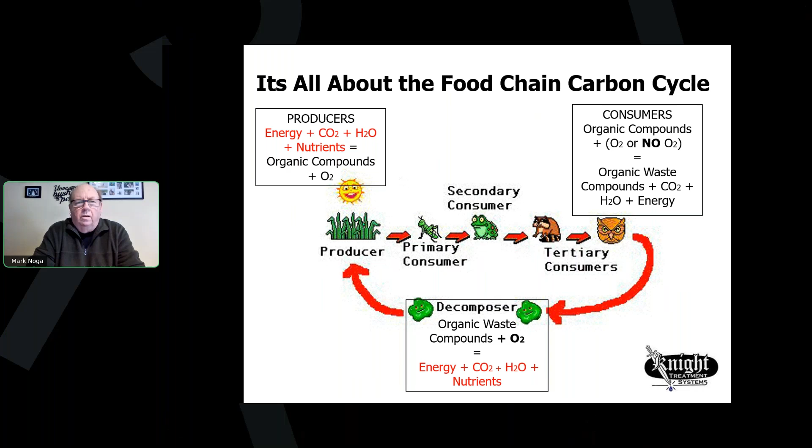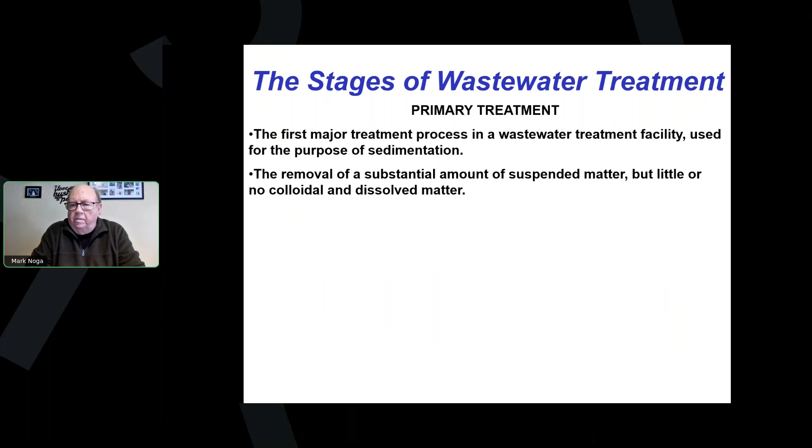When we look and we talk about wastewater treatment, there are three primary stages. Primary treatment is the removal of suspended matter and settleable materials and solids. In an on-site system, this is done at your septic tank.

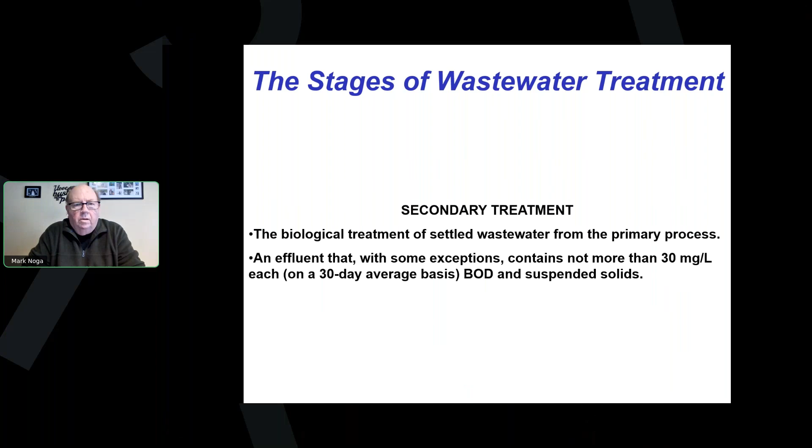Then we get into the secondary step of the process, secondary treatment, where we rely on this biological workforce to take and break down the organics to relatively small and harmless compounds, and effluent by scientific measurement, typically no more than 30 milligrams per liter BOD or suspended solids.

Then we get into the third step, tertiary treatment. This is after all the biological processes have been completed, because it involves removal of nutrients, nitrogen and phosphorus. You'll hear about technologies that talk about removing nitrate or phosphorus, but if they get ahead of the process and don't break down the organic constituents, you can run into problems.

Organics are measured in a term called BOD-5, the biological oxygen demand over a 5-day period. A general rule of thumb in wastewater treatment is for every 100 parts of BOD organics you have, you generally need 5 of nitrogen and 1 of phosphorus to help the workforce. We're going to talk about that a little more.

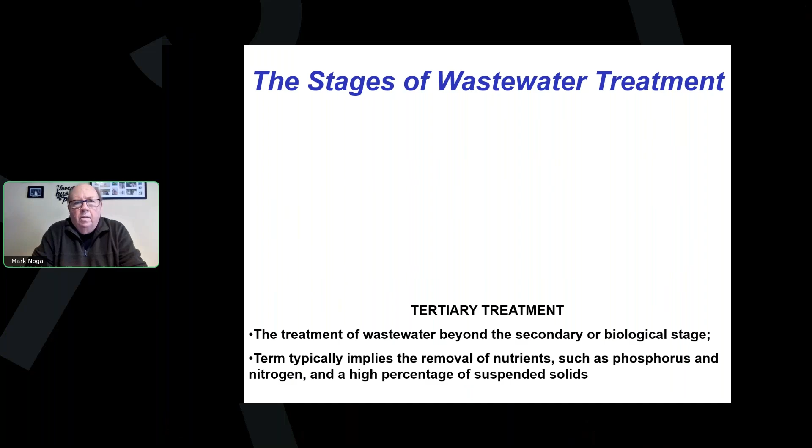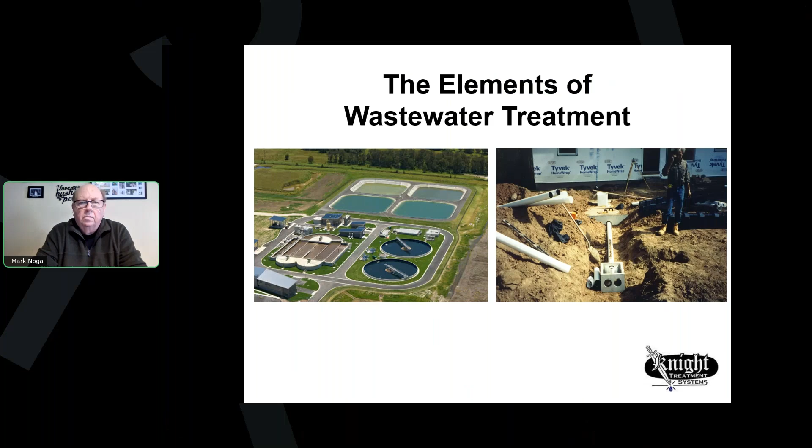Elements of wastewater treatment: the fundamental principles behind wastewater treatment are universal. They're the same whether you're looking at a large-scale community treatment works or one of the small individual on-lot systems. What we have is a workload, okay?

We've got organic constituents in the waste stream, and they vary widely across our society, whether we're dealing with a single-family individual home or a commercial establishment that generates higher strength wastes, such as a restaurant or a food facility. So knowing what the workload is really dictates what type of system is needed to accomplish complete wastewater treatment. Knowing that workload is very important.

Then we've got the workspace. Where are we going to try to complete this wastewater treatment? Your wastewater treatment system is much like a recycling factory. Certain things need to be disassembled or broken down and sorted into elemental components for return to the environment. Workspace can highly vary where this biology happens. We'll talk a little bit about that.

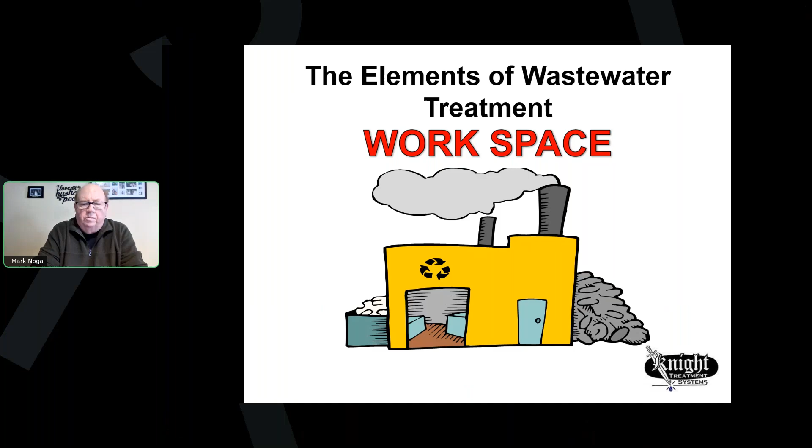Then we've got the work environment. Much like you, myself, and the other people on this presentation, we all have optimal working conditions. Well, in the biological world of wastewater treatment, such things as the pH of the wastewater, the wastewater chemistry, the constituents that come down a waste stream matter.

If you think of it, at least in my short lifetime, I've watched the waste stream evolve significantly. It used to be that if you didn't eat it or drink it, you flushed it down the toilet and that was it, it was taken care of. Now we've got all sorts of cleaners, additives, chemicals, everything from disinfectants and body washes to non-biodegradable ingredients, and all have an impact on how the process works.

We want to look at such physical aspects in the work environment as temperature. The biology is very temperature sensitive. Think of refrigeration—cool temperatures slow down the process of decay. That's what we're talking about here in wastewater treatment: we want to erode or decay the constituents, and much like us, temperature has a big bearing on what we're capable of doing.

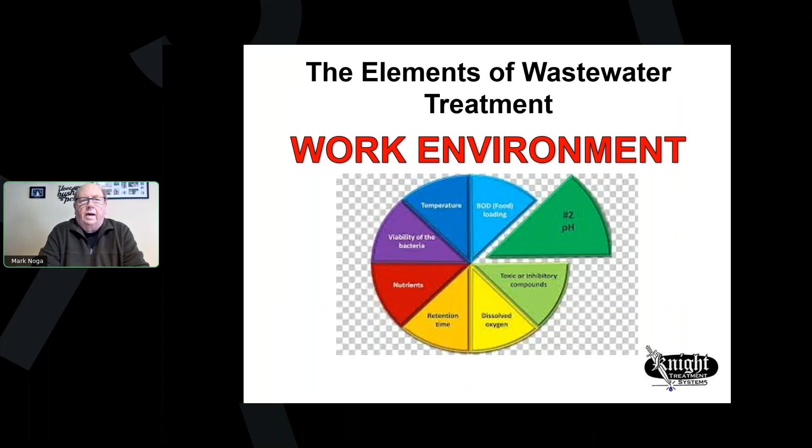Then we've got the workforce, the multitudes of bacteria available out in the world, and science is still discovering more. Where the work is taking place is going to direct what kind of workforce we have. Not all the workforces and environments are the most optimal to break down certain elemental components, but we highly rely on this workforce. So when we talk about these things, we talk about the environment.

In a conventional septic system, soil must provide the right conditions, both vertical and horizontal separation, to create aerobic conditions for the biological workforce to convert waste into harmless byproducts. That's why in a traditional system, shallow trenches are best—long, narrow, shallow trenches. We don't want saturated conditions; we want to apply the wastewater and then give them a chance to do their thing and promote gas exchange.

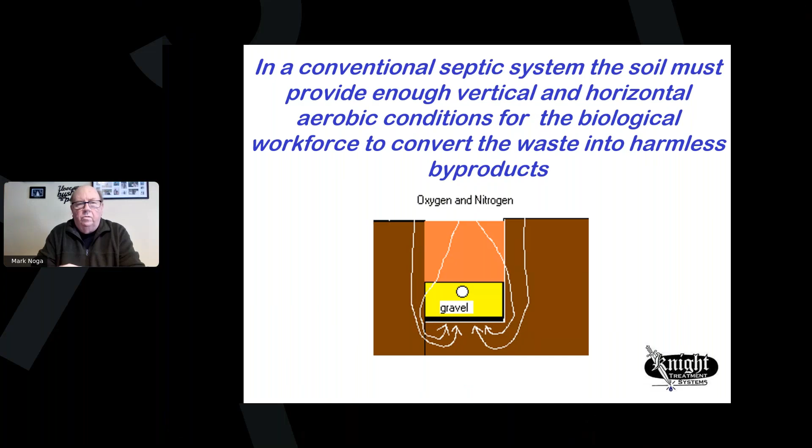When you look at the soil profile or the soil interface, soil is made up of very diverse particles of various sizes, types, and shapes.

And it's the spaces between these soil particles that are the conduits for fluid movement and gas exchange. When we get into some sediments, silt and clay, they're more uniform in particle size. They have just as much pore space available volume-wise, but they're a lot smaller.

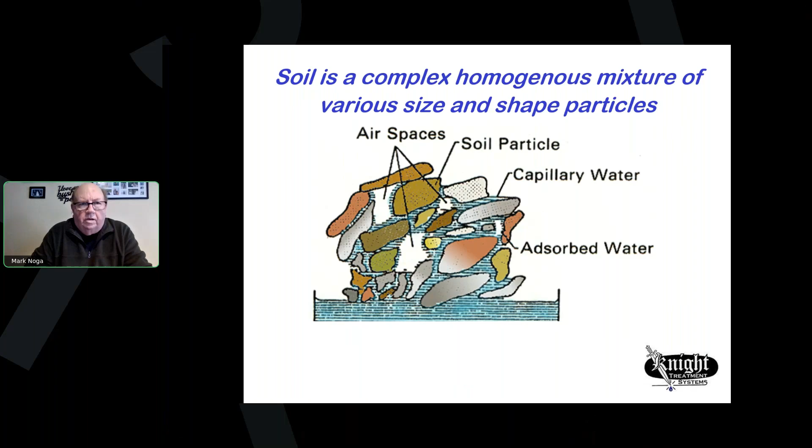I don't know how many of you are familiar with EPA's 2002 update of their on-site wastewater treatment manual. It's available online through the EPA, but if you go and look, there's a great chapter or section in there about wastewater application to various soils and what you might be able to expect for treatment.

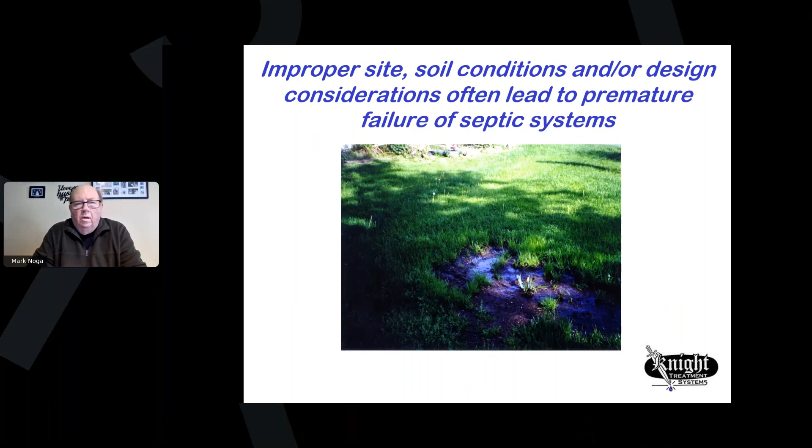When we have a failing septic system, we are certainly providing contamination to ground and surface waters. And a septic system need not fail or come to the surface to be in failure of providing adequate treatment. Look at some of our coastal zones where nitrate loading is very important. Dealing with some very porous soils and coarse sands, we're getting nitrification of the ammonia in the wastewater, but we don't have a chance to denitrify it, and it'll cause coastal issues.

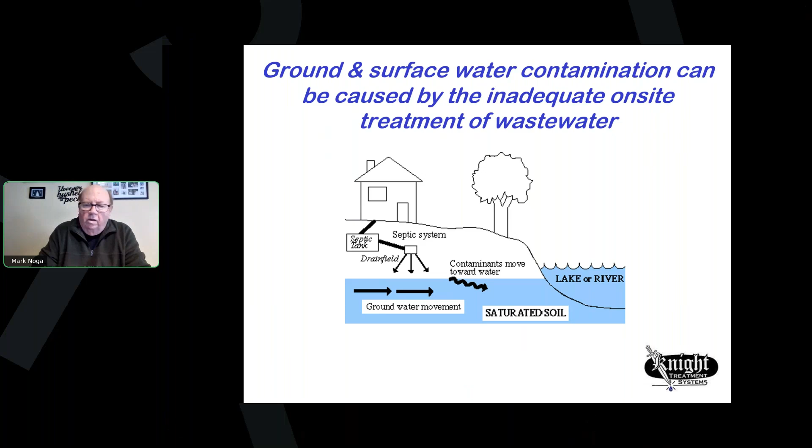Surface breakouts in freshwater zones - it's the phosphorus that normally can get bound up by iron particulate in the soil, but when it comes to the surface and is captured by stormwater runoff or overflows, you're going to have eutrophication of the lakes.

So understanding forms of on-site treatment technologies, to identify acceptable options, is very important, whether you're in a freshwater or coastal zone. And there's a wide variety of techniques out there.

And if you think of them like automobiles, okay - automobiles are universal in name, but each one has maybe a different property or a different attribute that'll do a job. Do you use a passenger car for a job that you need a dump truck for? So we're going to talk about these a little bit.

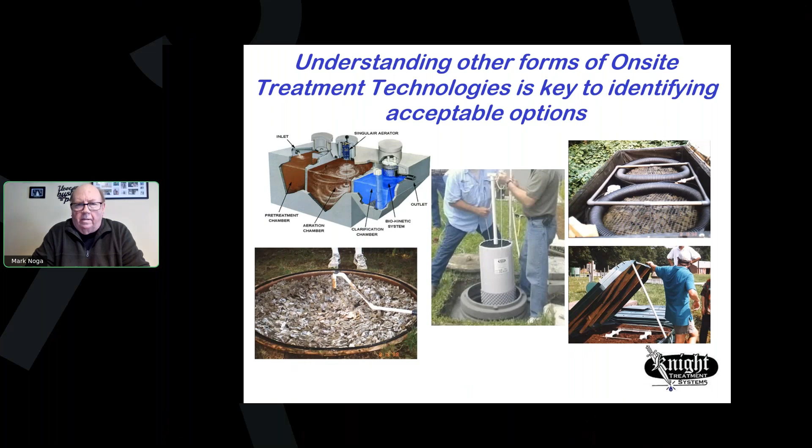The advanced on-site treatment systems, there's really nothing magical or mystical about them. They've been around for an awful long time. And most of the innovative technologies out there simply provide a more friendly workspace and environment where efficient biological treatment can occur. Time is also important.

Just like we need some time to eat a meal in a comfortable manner, the biology needs to be able to have enough time to break down the wastes. And wastes can come in very simple forms, such as sugars, or more complex forms, such as fats, oils, and greases.

So here again, many of these technologies out there are looking at providing and managing the operational environment for the biological workforce. In a large-scale municipal treatment works, you've got people that monitor this every day and make the adjustments. There are some systems out there now for on-site systems that are making that remotely possible, so you don't have to have a human being physically present every day.

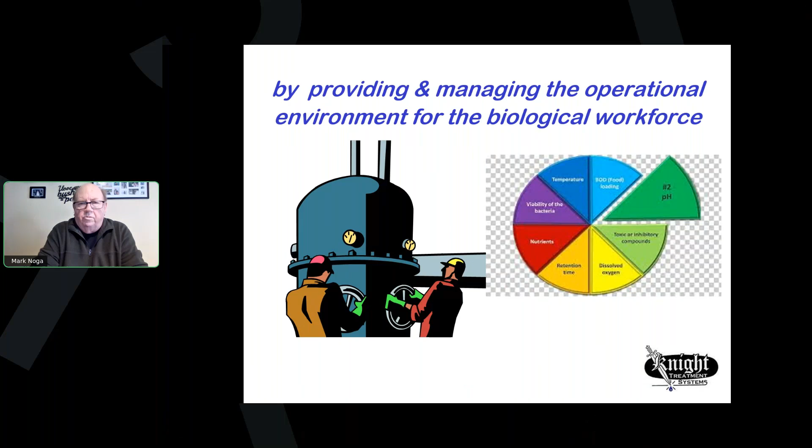And the fact of the matter is that distributed wastewater treatment on site is quickly picking up pace in our world. We can no longer afford to sewer the world. It's been a realization for many years. So some type of management is very important. And here again, managing the environment and the water chemistry and work conditions can get quite complex.

There are a few technologies out there that, instead of relying on the random and inadvertent selection of the biological workforce, science and biology has evolved to the point today that there are some technology suppliers actually putting a select group of microorganisms, introducing them and turning vessels into nurseries where these more aggressive forms of organic consumers can accomplish things a lot better than what would naturally populate a liquid environment.

Give you an example. Back in my day, the Exxon Valdez ran aground up in Alaska and released a phenomenal amount of crude oil. More recent is the Gulf oil spill with the platform that gave up millions and millions of barrels of crude oil. There were actually physical locations out there where the crude oil couldn't be cleaned up, and science had allowed a group of microorganisms - or discovered a group of microorganisms - that readily digested crude oil in place, that could be used.

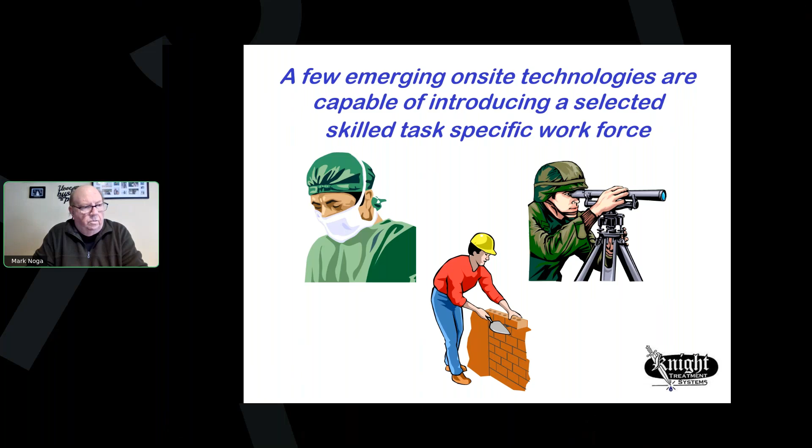That same type of science is being used today in on-site wastewater treatment. And more recently, with our interest in nutrient reduction, there are some processes that have been developed where it's absorption or bonding to various types of media, like a magnet would pick up steel. These compounds would absorb phosphorus. But here again, it's very important that phosphorus needs to be available, or at least a portion of it, until the end of the biological processes happen.

There's a technology showcase, and this is actually all not that new. This is what I originally did this presentation on. It's a City of Syracuse Skaneateles Lake demonstration project. It was part of the National Decentralized Water Resources Capacity Development Project. Back in 2002, a grant was provided to the City of Syracuse to put on this technology showcase.

Funding was provided by US EPA. There was a project coordinator and manager, and what it involved was the City of Syracuse Skaneateles Lake, primary drinking water source for the city. It enlisted the aid and guidance of various agencies in the watershed: Syracuse Department of Water, New York State Department of Health, Department of Environmental Conservation, the three county health departments, and the New York State Onsite Wastewater Treatment Training Network.

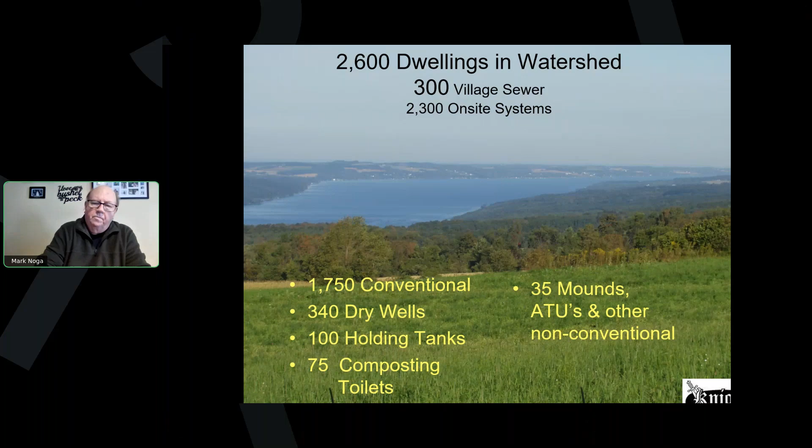Back then, Skaneateles Lake watershed had been managed since the late 1800s. They're very adept on what they had in their watershed. The inventory at that particular time was almost 2,000 conventional systems, 340 dry wells, holding tanks, composts and such. They put together a technical committee from the people that had joined the stakeholder group, and they went into design considerations, treatment cost, operation and maintenance, and system dispersal.

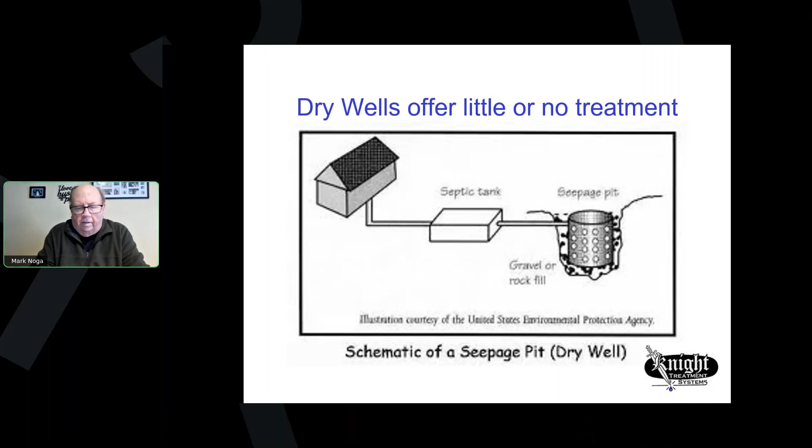The primary focus of this technology demonstration was to eliminate seepage pits and dry wells that were within 100 feet of Skaneateles Lake. As I said, Skaneateles Lake water is actually one of the largest unfiltered drinking water supplies in the United States. They don't put it through any kind of filtration system right now. They simply chlorinate it and put it into their reservoirs.

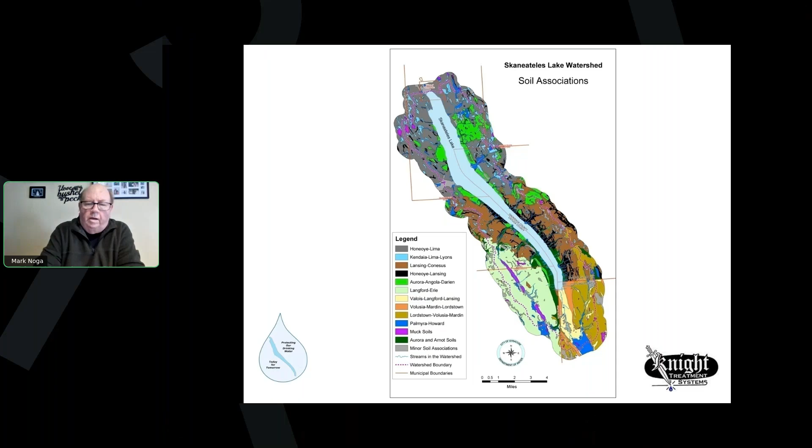Now, when you look at traditional conventional treatment, the soil types and the topography of Skaneateles Lake really aren't conducive to doing traditional in-the-soil-based treatment. So they looked at technology, and this was a technology demonstration project. They're looking for technologies that would deal with steep slopes and shallow depth of bedrock.

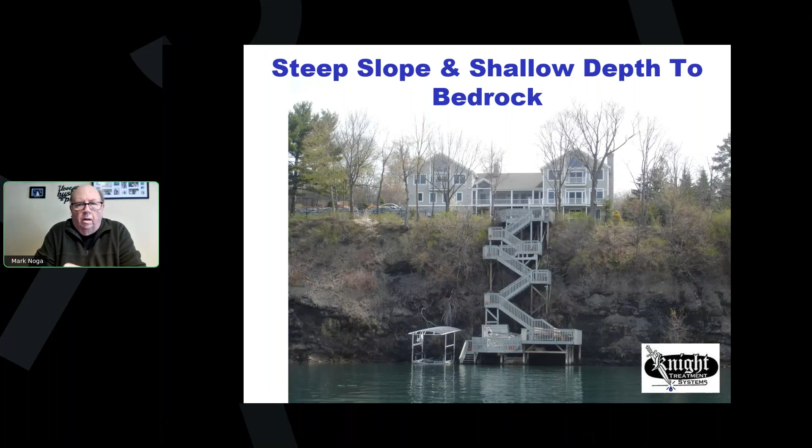Very little or no separation to surface waters, a multitude of summer residences and such, built right on the shore of the lake. Extremely small lots because waterfront property is very high in value. And then here again, steep slopes, very concentrated watershed. If I remember correctly, it's about 93 square miles, all that watershed, very steep slopes, runoffs occur very quickly.

In preparing for this presentation, I thought, let me do an AI search because it's becoming a big thing. Let's see what it comes up with when I pose the question: what's innovative in on-site technologies? Talk a little bit about them.

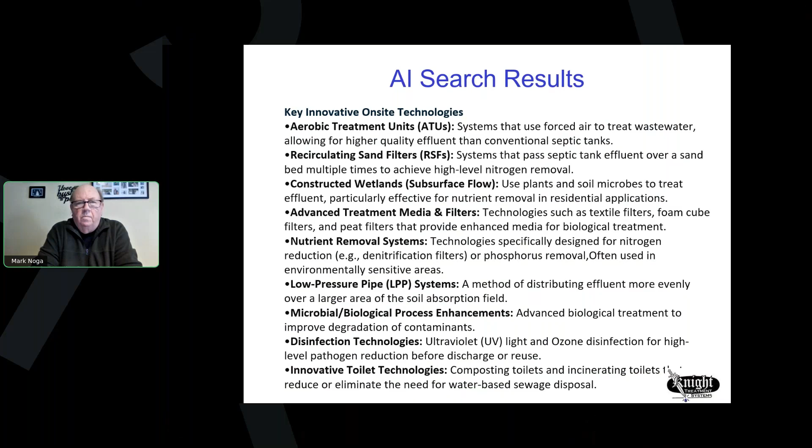So when the Skaneateles demonstration project came to be here in the early 2000s, what they were going to exhibit was gravelless types of technologies. That's where instead of a rock pipe trench system, medias were introduced underground via pipes and such, synthetic materials to grow the biology on instead of the surface of the soil particles.

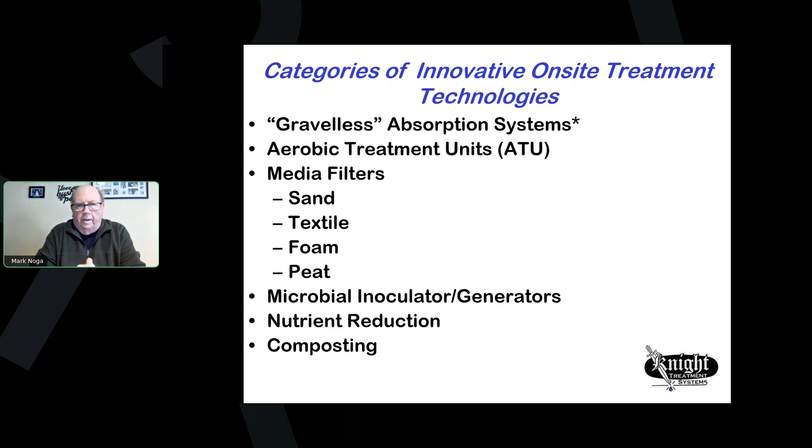You had aerobic treatment units, talk a little bit about them some more. You got your different media filters: sand, textile, foam, and peat, microbial generators, nutrient reduction, and composting. So this was what was put on at the demonstration project.

And they set some preliminary requirements when you're looking at these innovative products. It should be pre-engineered, small footprint, needs a proven history of performance, disperse clean water, and we'll talk a little bit about clean. It should be clean in color and eliminate clogging of the dispersal system.

And what they did is they turned to NSF Standard 40 Class 1 systems. NSF Standard 40 Class 1 is a yardstick that manufacturers can use to put their product up against to be tested to treat an individual residential system's wastewater from a single family home. It's not a standard that you should use to govern multiple system cluster systems or high strength like restaurants and such. There are other ways and means of doing it. Standard 40 is an individual residential home system, and it's for a complete system too.

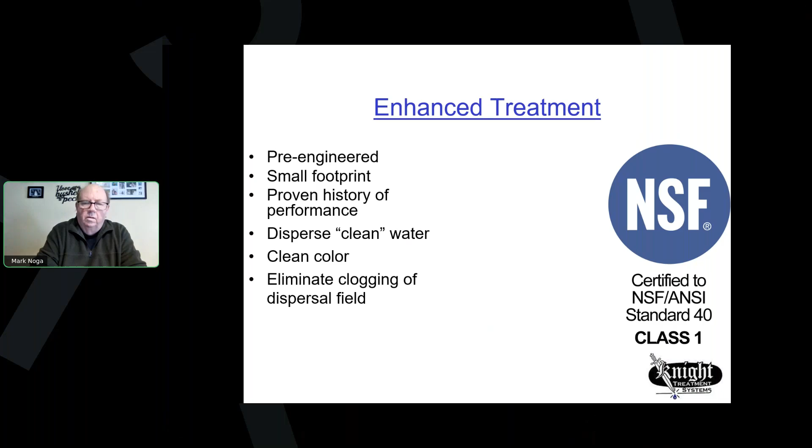What the technical committee was looking for is any supplier of these products to have written instructions on both their installation and their maintenance and their applications. What can they do and what can't they do?

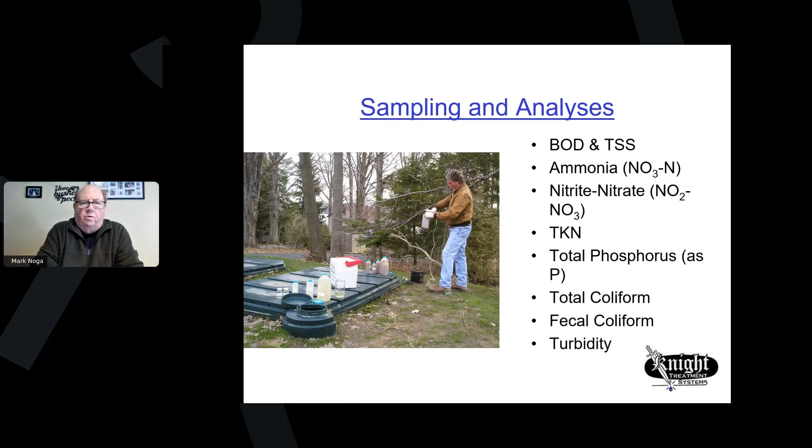The project involved sampling and analysis by an independent third-party entity, looking at biochemical oxygen demand, total suspended solids, ammonia, nitrate, total Kjeldahl nitrogen, phosphorus, total coliform, fecal coliform, and turbidity. A number of project sites or homeowners were able to submit for grant money.

If they met the criteria, 19 systems were put in. 18 of them were residential, and there was one commercial system, a restaurant at the southern end of the lake called the Glen Haven.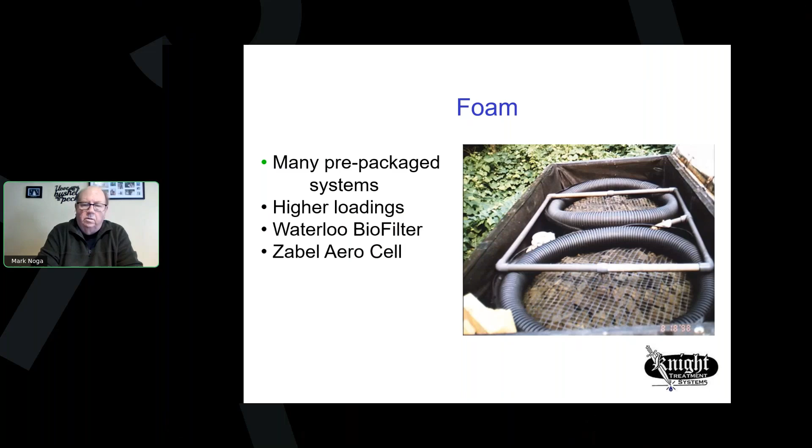Textile filters, open foam, what it does is offer greater surface area, periodic dosing with control panels. Normal dosage, when you're looking at soil characteristics, if you can introduce a gallon per day per square foot to the soil under decent conditions, you can give phenomenal loading rates to these textile filter type systems.

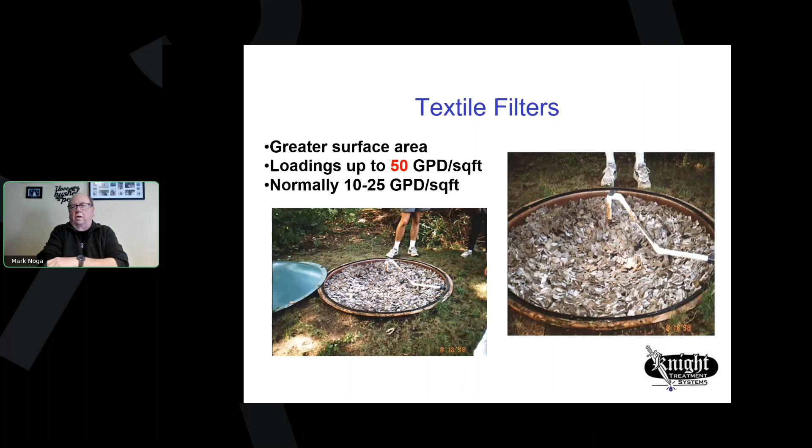Peat systems, peat moss, because of its open cell structure, very tough to degrade. A number of these were looked at and put into the system, a couple of them, Puraflo, Ecoflo, trenches, very important.

Nutrient reduction, here again I spoke earlier that nutrients, nitrogen, severely impact water quality and can affect public health. Drinking water supplies out on Long Island, for example, have contaminated lower aquifers with nitrates. There's a big push in that area and other areas of the country, Florida being another. Not only nitrates there, but phosphorus also. Traditional on-site systems are extremely limited in their ability to remove the nutrients.

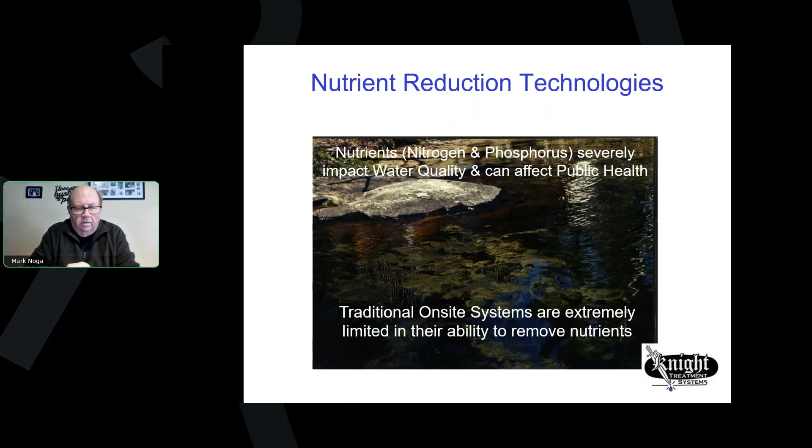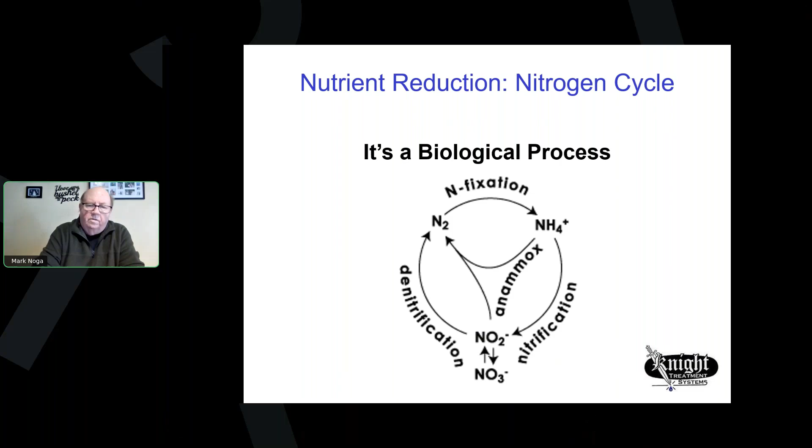Nitrogen reduction is actually fairly easy compared to phosphorus. It's a biological process. What happens is you've got organics coming in, you need to break them down totally. And when you have low BOD and lots of available free oxygen, another bacterial workforce comes in and accomplishes nitrification. There's also another process called anammox, which is a direct path for nitrogen to be removed from the system.

Recirculation is the best way to accomplish it when you've got a good, robust treatment works that breaks the organics down and produces secondary effluent that can be recirculated to the head of the treatment works. But you need a carbon source for this biology in an anoxic zone, meaning not totally anaerobic or without oxygen, but very low oxygen concentrations. The way it's being accomplished today with sand filters, media filters, ATUs, is recirculating it back to the head of the treatment works, the septic tank or the trash tank, doing it on a managed basis. Very, very successful.

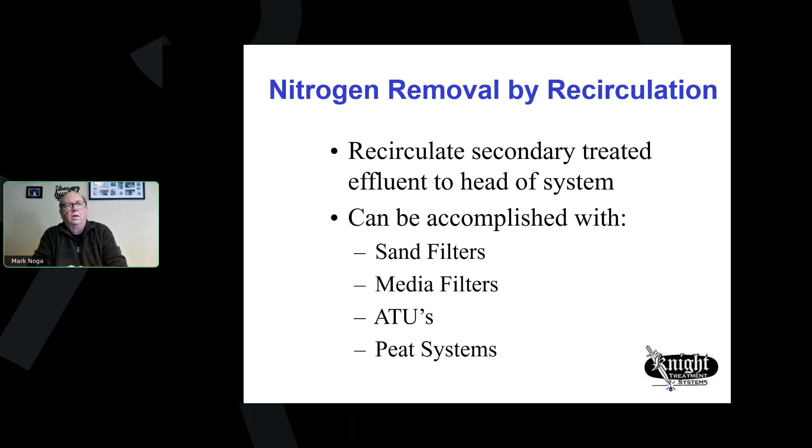Recirculating sand and media filters can be configured to promote that denitrification.

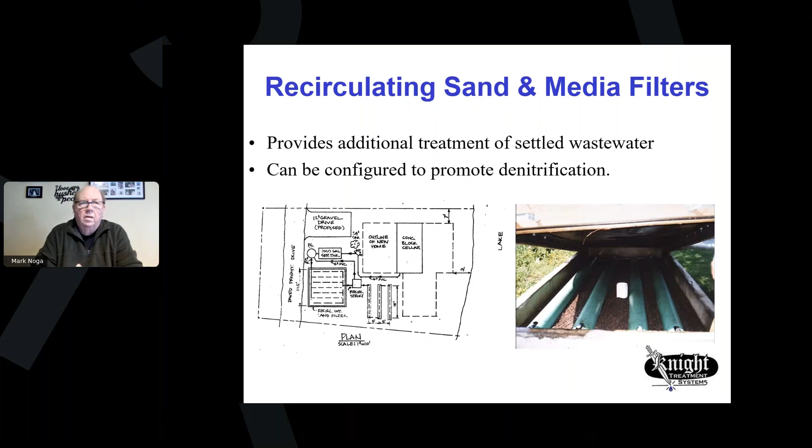I'll leave this to you. 20 years ago, I was involved and we patented an effluent filter that used various medias to capture the phosphorus. Looking at previous work, what was happening is if you tried to do it prior to the biological stage, biological films would develop on the media and use it, creating it as a magnet, attracted to it, like putting insulation on the magnet. It got to the point it couldn't take anymore.

So here again, for those of you looking at nutrient reduction, make sure that you get a very, very high quality effluent if you are going to use one of these ionic bonding type materials.

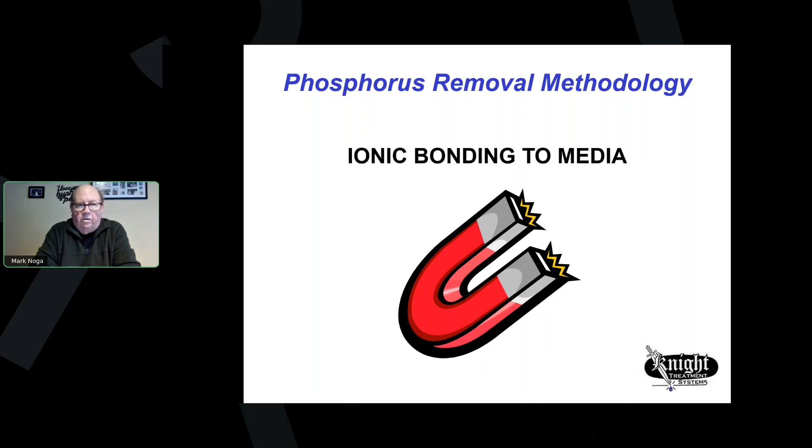The key to the success of any of these advanced treatment technologies is the greater the post-installation attention that it receives, the better it's going to perform. Under NSF Standard 40, they require that aerobic units are serviced at minimum twice a year, at 6-month intervals, to make sure that they're operating properly.

There are many localities out there that will not allow the use of an advanced or innovative system without some type of service agreement and management entity in place. The more complex the system that's out there, the higher degree of maintenance required.

There are systems out there now that are using membrane filtration, like the principles of reverse osmosis, to remove the pollutants and the organics, and even right down to the minerals out of the waste stream. And you've got to pay attention to this because they do have a waste product themselves.

The washings from the screen need to be addressed somewhere. So you're preventing them from going one way, but you got to take care of them another way. So just be aware of that.

Membrane filtration in small on-site systems can be quite complex. Mound systems, pump stations, service entities really need to be on top of their game. It's just like automobiles now - there are a wide variety of products out there, and many of the replacement components are proprietary to the provider. So you want to make sure you get competent, qualified entities taking care of these things if you're going to use them.

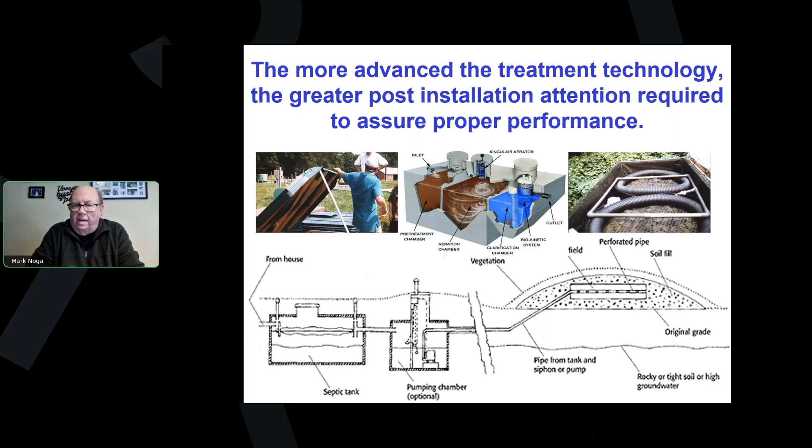So that's my spiel about advanced on-site systems.